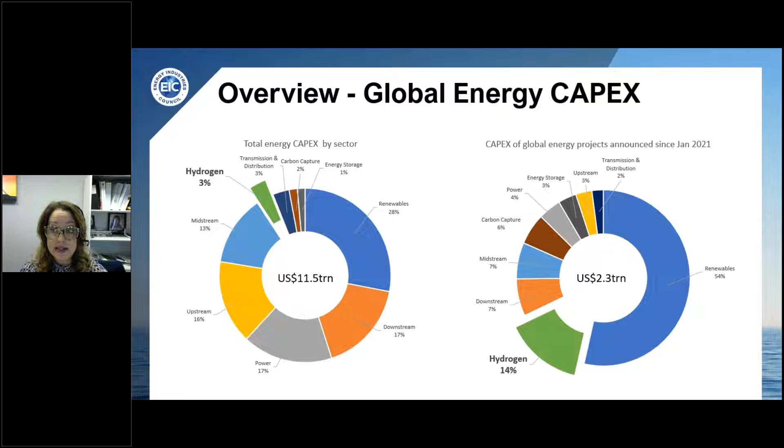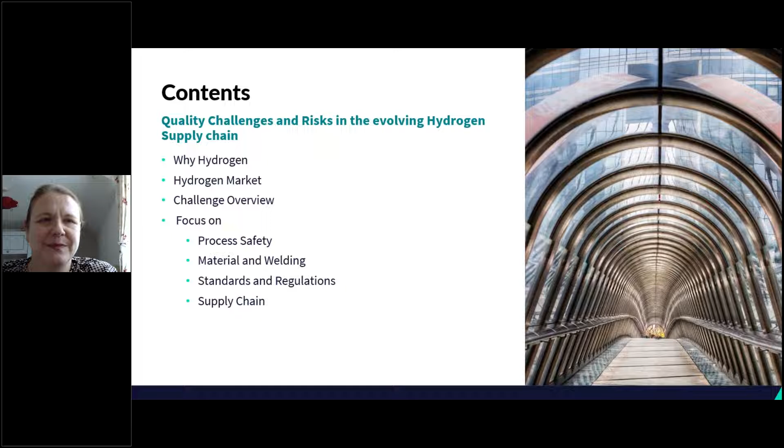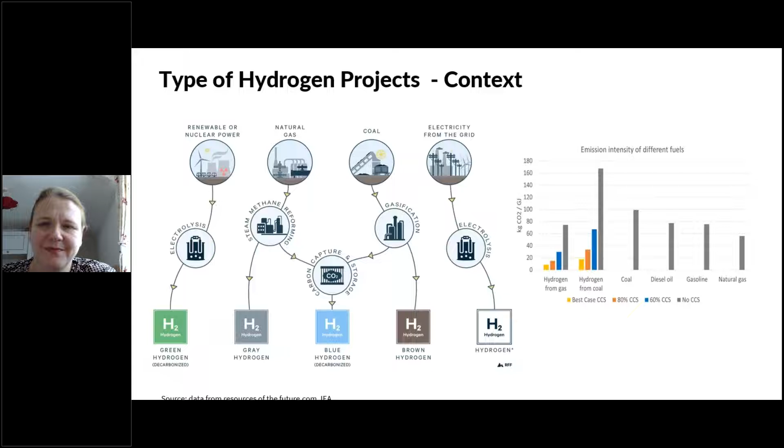So why hydrogen and why now? Amanda alluded to this, but we see in the news all the time targets being set by governments, by industry, and COP26 was a real accelerator for the hydrogen industry and the decarbonisation industry. We also see here in Europe the conflict with Russia and Ukraine really accelerating projects, particularly around Northern Europe and the UK, as security of gas supply becomes an issue. I really saw that in the conference yesterday. A lot of the large projects in Europe are really starting to get pushed forward on the back of that.

So all of the projects and concepts that I talk about today are all hydrogen being used for energy or climate change mitigation purposes. So this isn't hydrogen in its common use, it's hydrogen in a new context, in brand new solutions.

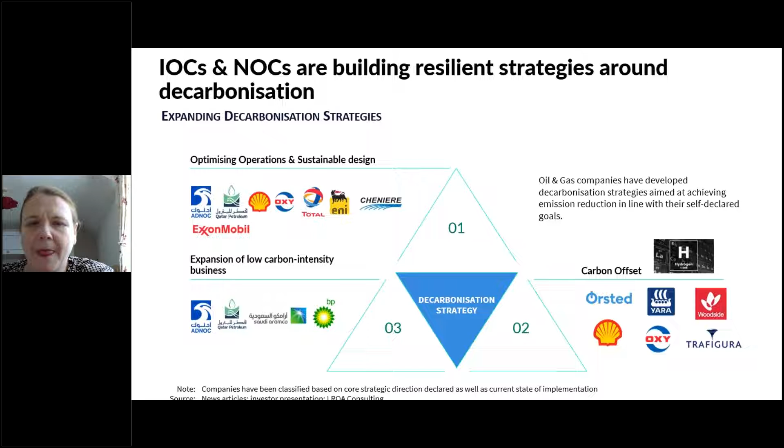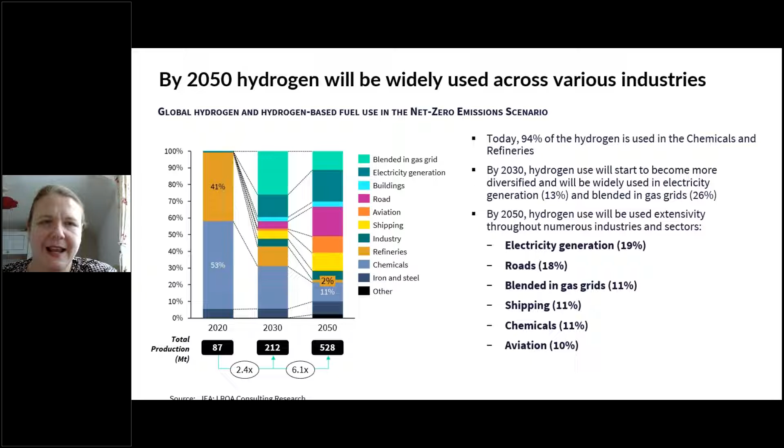So there's a whole big range there, and I think that's one of the things to look at. Yes, this is a very exciting market. This is something that has got a lot of noise at the moment, but are we ready yet? Perhaps not. The big projects are being talked about. Have any of the very large projects got sanctioned? Not quite yet. So we need to take that into consideration.

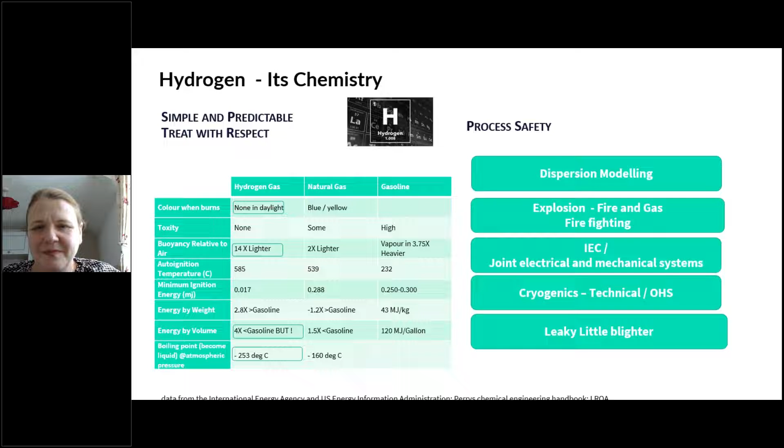What I would say, if we do look at the chemistry as well, is being a very small molecule, it's also a leaky little blighter. And what do I mean by that? Next slide. I mean that from a mechanical perspective, it's also very easy to get into cracks and get into damaged welding, etc. And it's something that needs to be considered when designing or selecting your material for design.

If we look at the different damage mechanisms for hydrogen, I've listed there just some of them, but the one that I'd like to focus on is hydrogen-induced cracking or hydrogen embrittlement. This is something that needs to be taken into consideration whenever you're designing or looking at reusing any equipment or pipelines, etc., for use of hydrogen. What do we mean by this? So if you've got a slight crack in a material, or you've got some damage of the material, or the bonding of the material isn't quite to specification, then hydrogen can get into these gaps and quickly form together to increase the size of the gap and have an issue.

You also have to take into consideration when you're looking at welding. The welding has to be of a high quality. The testing that you do on the welding has to be increased to make sure that there's no risk of hydrogen penetrating the welding and again expanding and causing issues. Hydrogen is so small as well. You also have the risk of absorption of hydrogen into certain materials, and that's something to take into consideration again when designing and selecting materials.

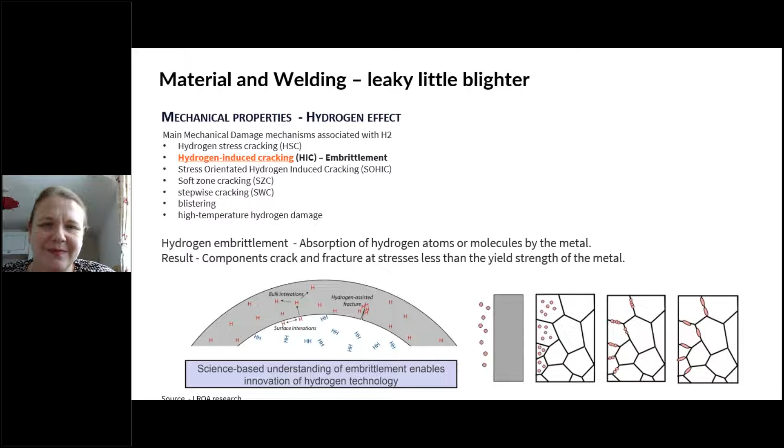Next slide. I've got an example here of how that is played out in standards. So if we look at the existing ASME standards for pipelines, and we look at B31.12 versus B31.3, which is the difference between using the material for a hydrogen process or a natural gas process, you'll see that what I talked about on the slide before regarding hydrogen embrittlement is taken into account with the way that the standard dictates what you need to do from a way of testing and stress analysis.

For example, when you're doing stress analysis, you need to consider more cycles to make sure that you have taken into account the risk of embrittlement. Also, certain alloys cannot be used for the risk of absorption, etc. And you have to take into account more stringent and more substantial testing methods, whether that's additional RT and UT, NDT or preheating, and also the requirements for welding qualifications and welding procedures are also enhanced and something that needs to be taken into consideration. Next slide.

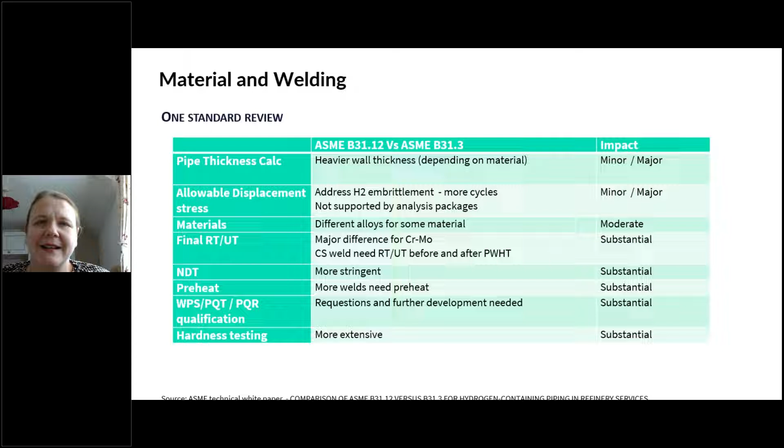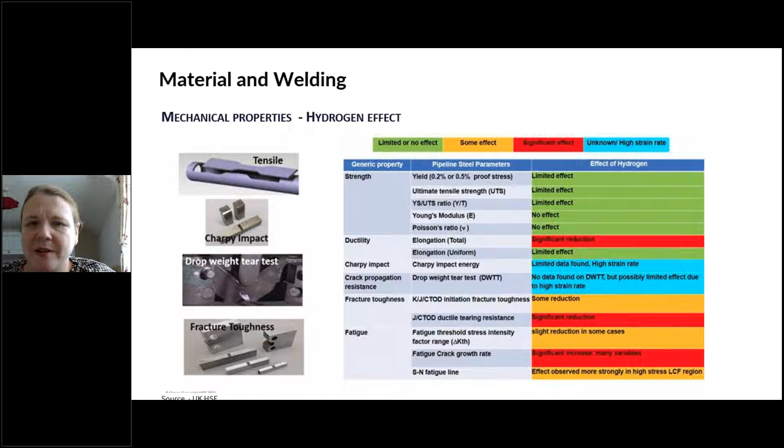If we look at the general testing that you would do for a steel pipe, and you look at the difference hydrogen has on these different tests, you'll see a significant reduction in elongation when you're using hydrogen rather than natural gas, so the ductility is less. You also see it being more susceptible to fracture, and the fracture growth rate is a lot more. So that's why in the ASME standard you have to do more cycles in the design review, and also when we look at the welding, we have to make sure that there's no potential cracks, etc., for hydrogen to penetrate. Next slide.

Now looking at standards, I just quickly want to run through this, and this is just to give you an idea of the standards that are out there. What I will say is the standards and regulation market for hydrogen is very dynamic at the moment. If I did a slide today, it would be out of date tomorrow, but this is just to give you a bit of an overview of what's happening. So you'll see on there the Chinese standards, there's much more of them than any other standard. We are seeing ISO standards and IEC standards either being updated or rolled out on a monthly basis, if not more regularly, and they're covering a whole range of different things.

For the US, we do see a whole range of hydrogen standards particularly coming in. We've mentioned ASME ones as well, but we're also seeing some NFPA ones coming into use, and there's a whole lot of US standards being developed. You look there at the mix of standards and where we're seeing them. So at the moment, the majority of standards are in testing and in safety. We're seeing fewer standards currently in production and applications. I think as we move forward and we really see a shift in hydrogen being used for fuel, etc., we'll see many more standards in the applications and fuel quality space.

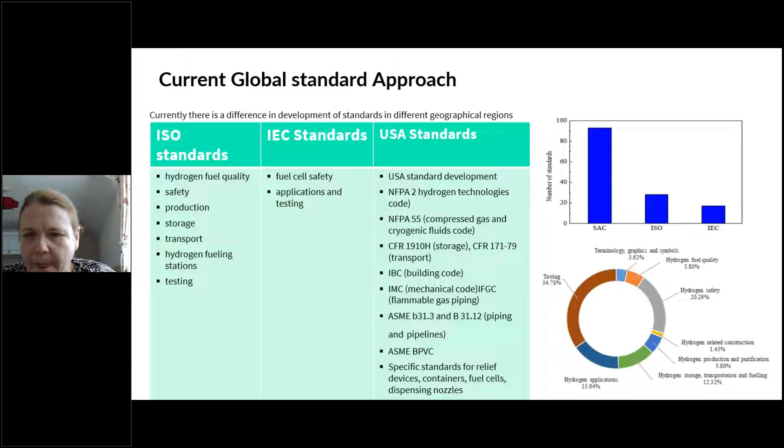Next slide, I've got an example from an Australian perspective. So what we're trying to do in Australia, like I said, is not add complexity, and also realise that from a trading perspective, there has to be some commonality across global regulations. So our first point of call is to look at ISO and IEC and see if they can be adapted or adopted for an AS purpose. So currently we've looked at around 14 and we've adopted around 14 hydrogen standards, particularly for the hydrogen market. Next slide.

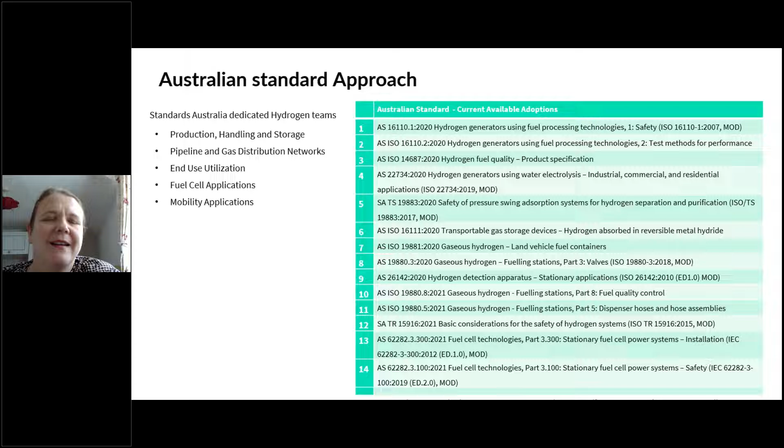But we're not even nearly there. So even if I look at what we've got to do, there's still 70 plus regulations that need to be reviewed, 10 plus pipeline standards, 30 plus fuel cell standards, etc. So there's a lot of work that needs to be done. So the idea is to look at prioritisation. What's of immediate relevance? What do we need to make the Australian projects a reality? What has a safety aspect? What is going to help or hinder our social licence to operate? And therefore putting the effort in them first to make sure that we roll out in the right time frame.

One of the things that we're doing from a national strategy here in Australia as well is also putting some case studies out there. So it's all well and good having all of these standards and regulations, but when a company comes to doing a project, they need some sort of case studies, some sort of models and matrix so that they can see exactly which applies, and that's what we're helping industry to do as well. It's interesting the IEC have rolled out electrolyser standards. So IEC generally focus on electrical.

An electrolyser has a whole range of different things associated with it. So it's not just an electrical component, it's a mechanical component, it has process safety elements, etc. Therefore, we need to make sure that all of these standards cover everything that could possibly go wrong with an electrolyser and not just focus on a single thing.